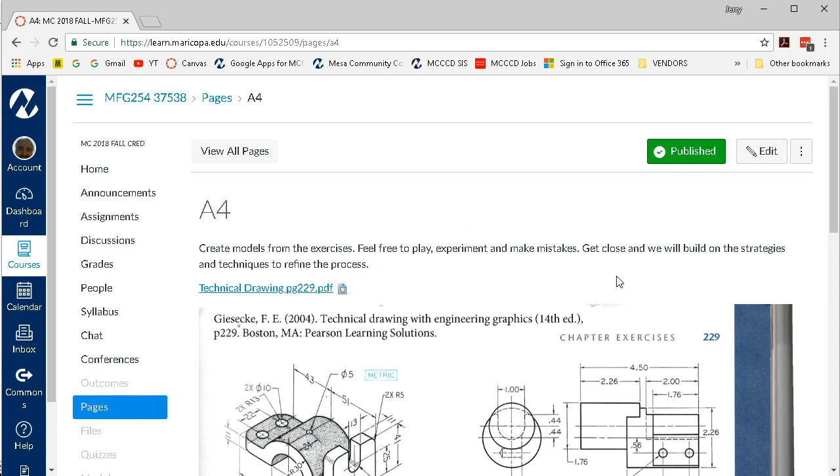So I mentioned rules of the game are take a look at this. We're going to build geometry that is close to this. If it doesn't come out exact, if you have problems with it, turn it in, we'll refine it. We'll build on this foundation material and improve as we go. All right, so this is a mix of kind of the first and second assignments.

So exercise 6-14 is in metric, just kind of taking a look at the shape. When you first look at any of these exercises, let me see if I can zoom up on that a little bit. When you look at any of the exercises, whatever jumps out at you as the best place to start is usually the best place to start. Things like the limit dimension, right? So we have an upper and a lower limit. Those dimensions we're not overly concerned with.

Looking at the shape, this front profile will be of my first concern, and then we'll go back and add holes, slots, fillets after the fact. So this is a building process where we start off with a piece of geometry, then we remove some material, maybe we add some more material. In previous videos, I've been fond of saying this is not name that tune where you have to create everything in one feature, one sketch. If it takes 2 or 3 sketches and you build on that geometry, that will work out just fine.

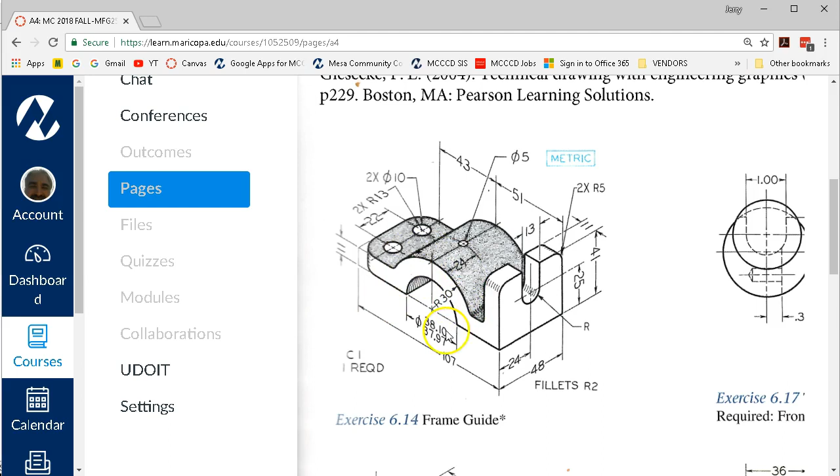All right, so our overall 107, height of 41, depth of 48, and then radiuses for the arcs. So fly that out a little ways. See if I can get it a little closer. Maybe not. All right, so since we're going into a new assignment, we'll pick our new part metric. And position just a little bit better here.

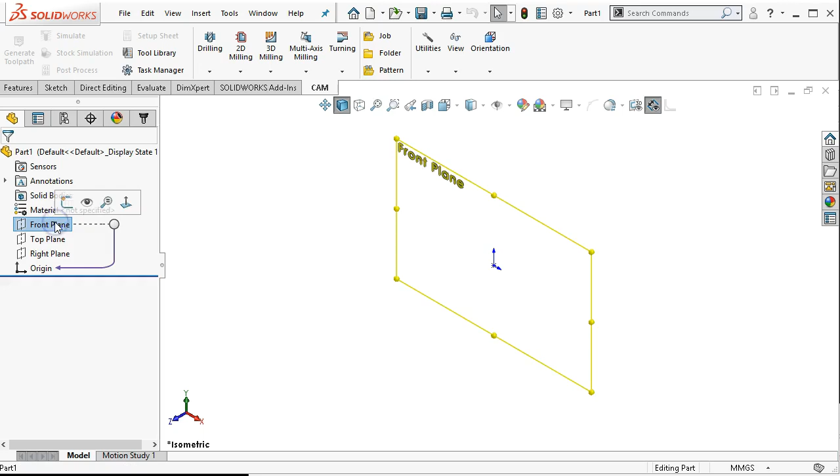All right, so the first assignment, we drew in extra geometry, extra objects in our sketch. So this time I'm just going to go front plane, sketch, and then as we start to draw this geometry, one of the things that you will encounter is called a continuous arc. So if you're comfortable with the strategy, then go ahead and use it. If not, you can switch over to the arc command, and on the upper we'll do that.

At some point you will accidentally on purpose do this, so what happens is you're in the line command, you're drawing the line, you happen to go back past the start point. So as soon as you cross through that start point, it switches to arc, and the tangent arc is going to have multiple solutions depending on which way you drag. Right, so I can always go back to that start point and drag a new arc. Well, most of the time it will go the way I want it.

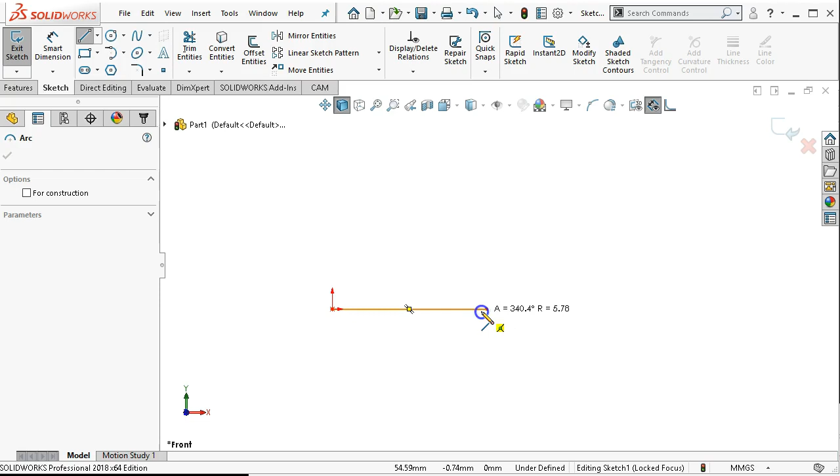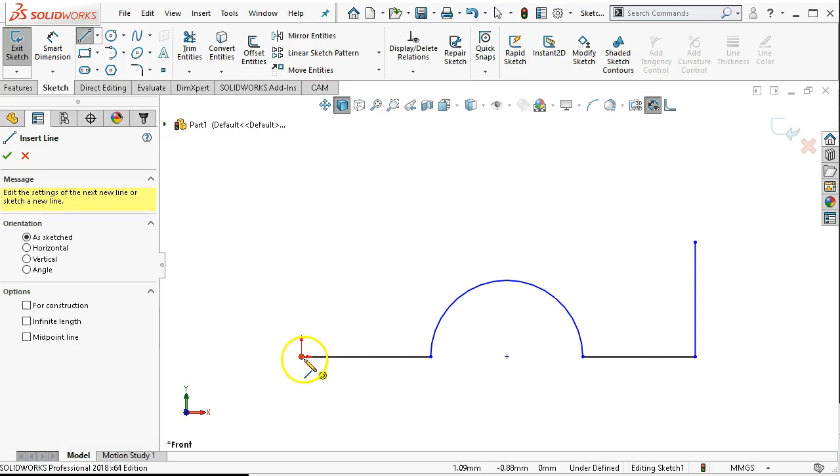Alright, so we had this solution a little earlier, and the advantage here is that once I place the arc, I'm right back into the line command and can continue with my line. Alright, the other not requirement is you do not have to go all the way around this part. As a habit or a tendency, I want to go all the way around, but let's go ahead and just take these first few items. I will go ahead and put another vertical so I can utilize it. Right, and then we'll put in the 107, should auto scale, and the outside was 41.

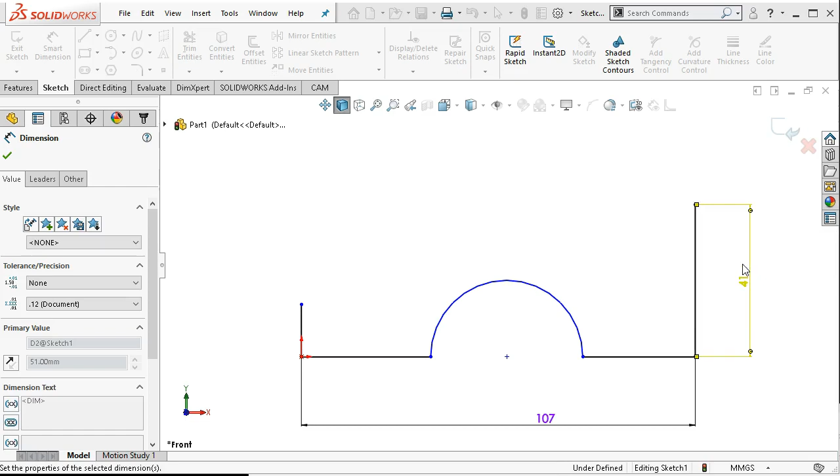Okay, we'll try that again, 41. And the arc radius of 30 was to the outside, and we have a thickness of 11, so that would give me 19. Alright, so I'm not sure I'm going to use that dimension just yet, but I do want to have it there for reference.

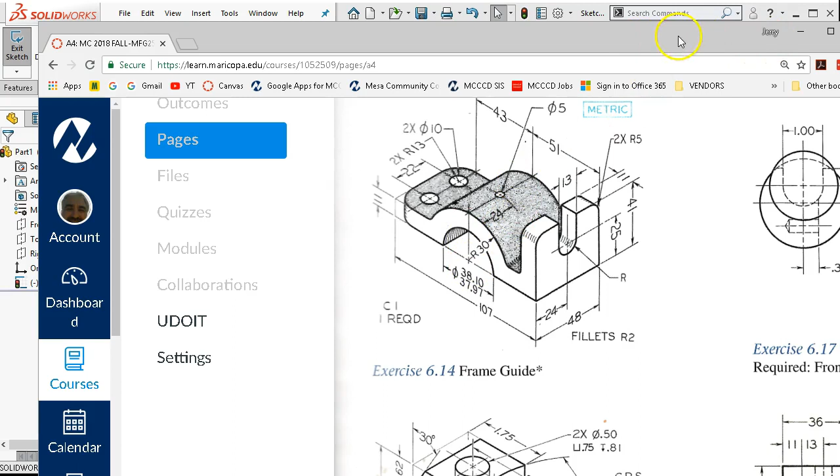So let's fly, see if I can control my views here. Let's go ahead and fly that in. And then as far as position, we have to be kind of careful when we're looking at these dimensions. I get tripped up on them pretty regularly, where the baseline to the center of the arc is 51, and then they carry the holes over another 43. So it's not exactly centered, but I do have to realize what datum we're generating this geometry from.

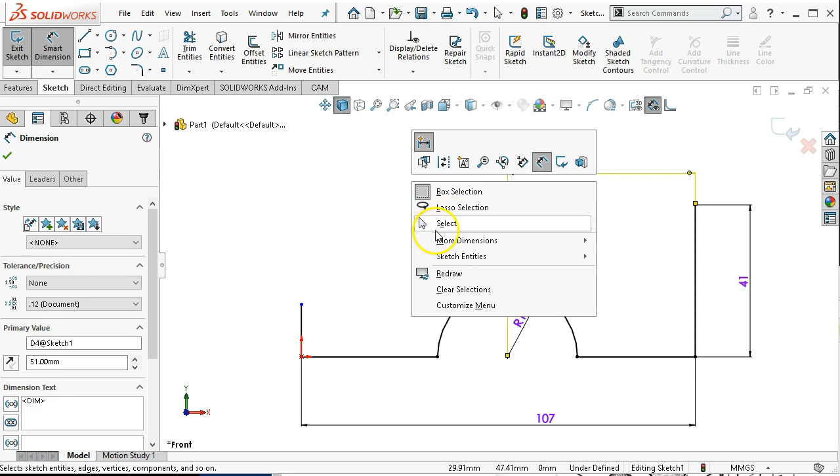So from the line to the arc, and again I would prefer that you use the perimeter or the circumference of the arc as opposed to going to the center point. So right click and select, or hitting escape on the keyboard will allow me to be back in selection mode. With the dimensions, kind of hard to tell. The endpoint is black, endpoint black, the object is black. That's fully defined. On the other end, I am coincident with the origin, so that endpoint will be in black.

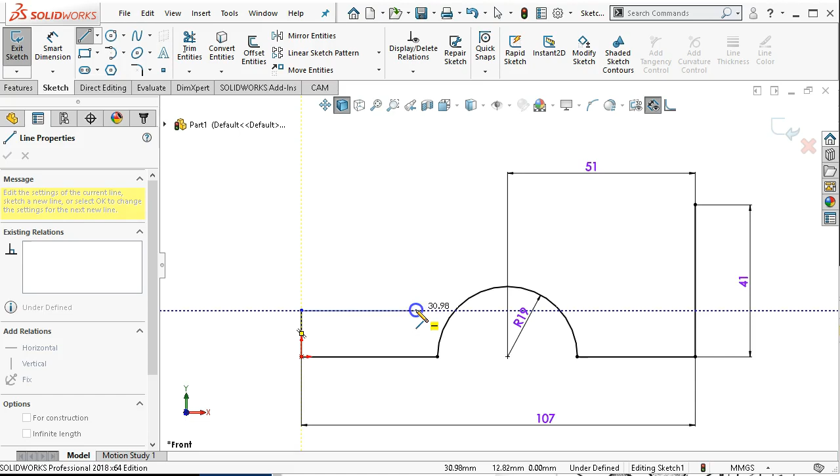The line object is in black, but the endpoint is in blue. That means that it can move, and because of the vertical relation and those constraints that we've applied, it can only move up and down. Okay, so we're going to come over, and I said we were going to use, I guess we'll use a center arc here. I'm going to go ahead and put the 11 dimension on. Gives me the thickness. Now I can see that I have a new blue endpoint to move. This endpoint goes to black because of the relation in the dimensions.

We're going to go to center point arc, and since these are concentric, then I will drag out till it finds the endpoint and then drag through. Alright, so as I'm left clicking and holding down, if you are a clicker, then you'll click, let go, bring it over to the direction you want, click again to position it, and then I'm going to right click to select, and then back into line, up and over, and had a little stutter there, so let's go ahead and get rid of one of those.

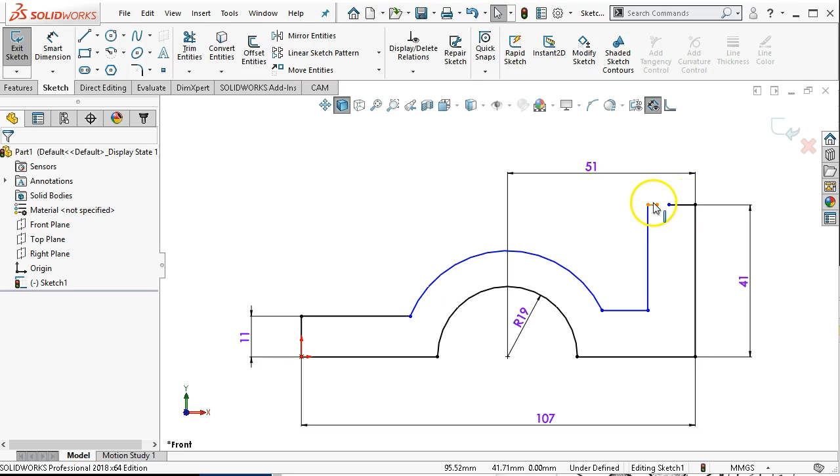So this is one of those situations that have a gap. You know, I hit a bump on my mouse pad, or let go of the mouse, had a twitch, I would get rid of one of the objects, because if I were to bring this one over and connect it, I'm going to see that blue dot as the endpoint, but that's not going to get me to fully defined. Right? Let's go ahead and hit Control Z. I could connect the dots, but that really doesn't do anything as far as geometry. It's not very clean, so that's not going to be a best practice.

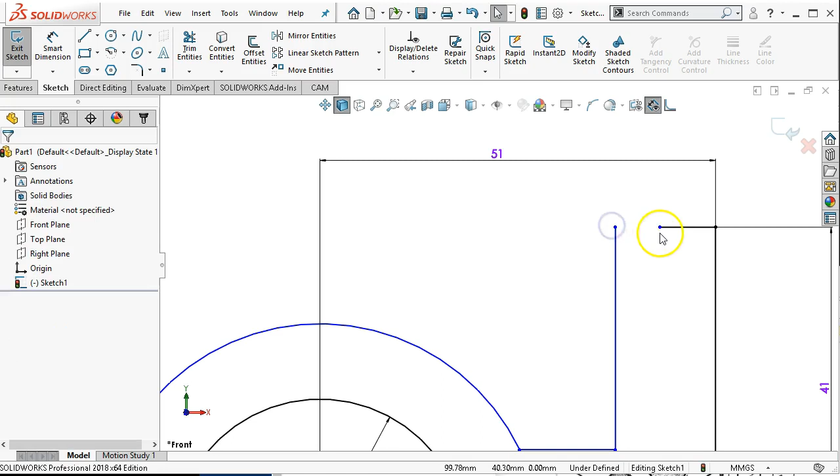Best practice is going to be highlight the object we don't think we need and hit delete, and then we'll drag that endpoint over and connect it. Alright, so we have a radius of 30. Right, and if I was to add one more relation or dimension, I can go between the arcs, but keep in mind that this is going to create a conflict. So this is where things get overdefined or not solvable.

So I place the 11. Make the dimension driven? Yes, otherwise it is going to cause an overdefined condition. I want to see that value of 11. I can apply it, it's there, but notice that its extension line is in gray, and if we double click on it, it's a driven dimension. It's not participating the same way that the 19 and the 30 are.

So if I wanted to include that one, we have parameters on each of these dimensions. If I click the 19 and come over to other, I can switch it to driven, or I could go ahead and delete it. I could delete both of these and reapply. And for the 11, if I want it to be driving, then I'm going to uncheck the driven. Now it's the primary value, and the 19 is the secondary value. So you have the ability to swap these out.

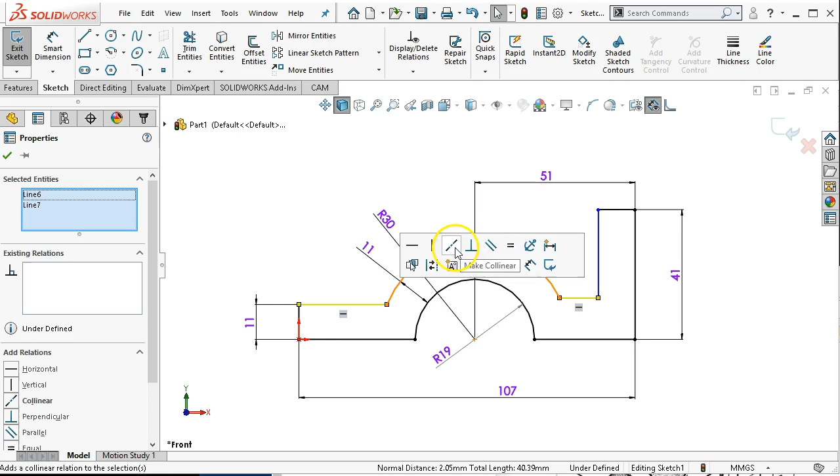So this object moves up and down my line, so I can select and then Control-select another line, and that would be collinear. If we happen to grab an endpoint and the line, then we would be looking at coincident. Notice collinear and those other relations aren't available on this selection. So depending on what combination you select, those are the relations that are going to be available. At this point, there's not any relation that's going to be better than the other.

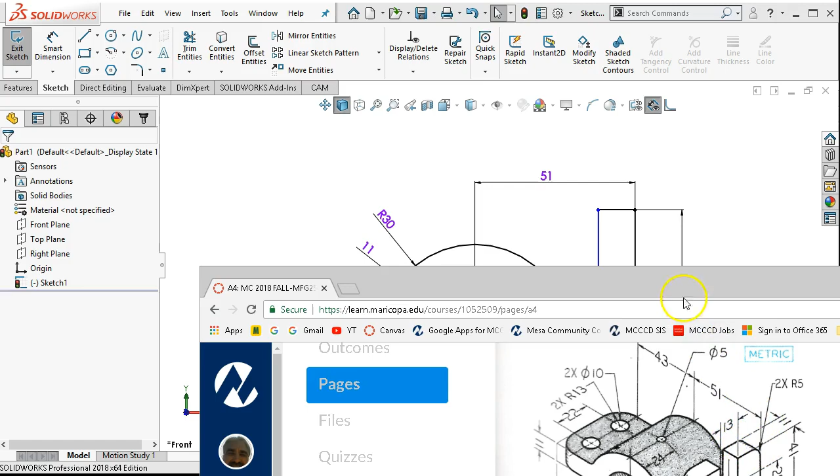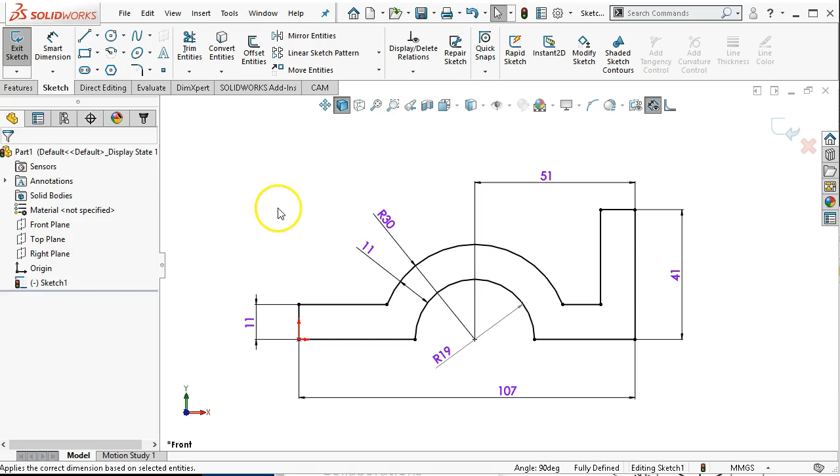So fly this back in just to make sure we have a consistent thickness of 11. So I want to maintain that 11 distance. In this case, I'm going to select Control Select: select the first line, hold down the Control button, and select the second line. Over on the relations, since I missed the pop-up, we'll go ahead and just come over to the Property Manager and set it. So the one issue would be the 11 for the radius.

There's other things that we can do to align those, but if I keep in mind that the 11s have to match up, making an adjustment on thickness is not really a big deal. So our thickness, or our depth, is 48.

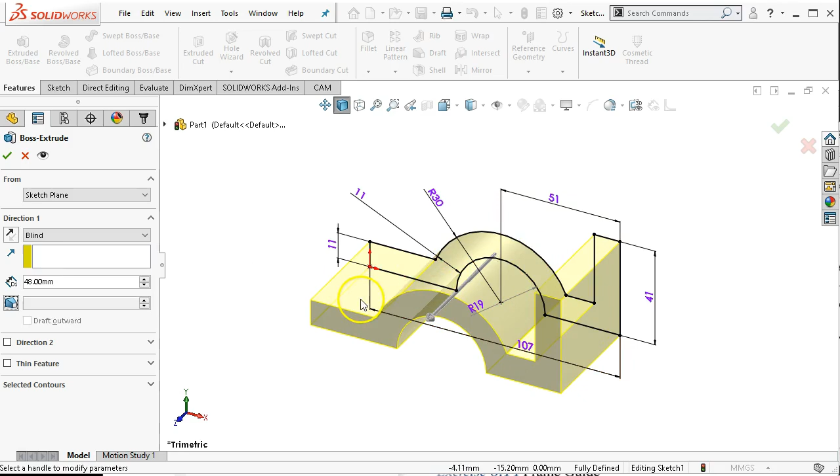So features, extrude boss base, and the choices: we'll put in the 48, blind in condition coming towards us, reversing the direction, or double clicking. I think it was double clicking the arrow - single clicking the arrow sends it to the opposite z. It's not really positive and negatives. Horizontals and verticals are more in line with the sketches, and whether it's coming towards us or going away from us is a matter of the way you see the model.

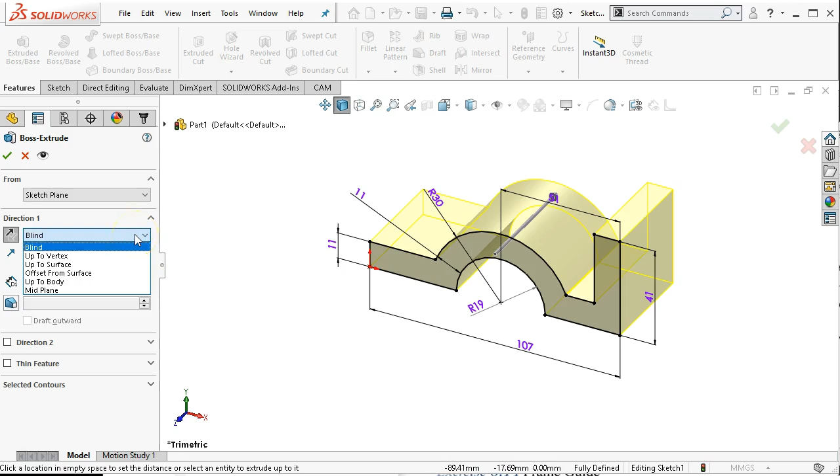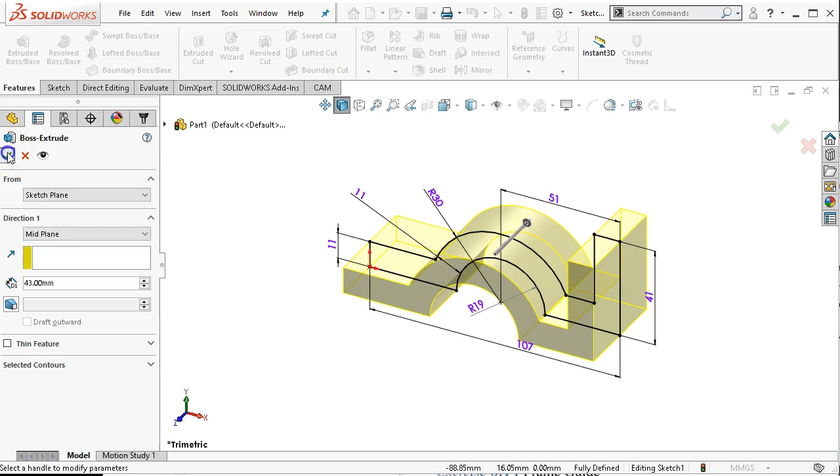So we have the blind in condition. I can also switch up to midplane, and I'm limited in my choices because this is the first object - there's not really anything to work with. So we create this solid. I'm going to stay with midplane. There are several items that end up going through the center of the part or are related to the middle of the part, so midplane has some advantages. If you go with the blind in condition towards you or away from you, that'll be fine as well.

All right, next piece of geometry, let's go for the slot. Slots are always kind of interesting - I tended to overthink them. So I'm going to highlight that face and hit Control-8 on the keyboard so that I'm normal to that face. And then we need to open up the sketch.

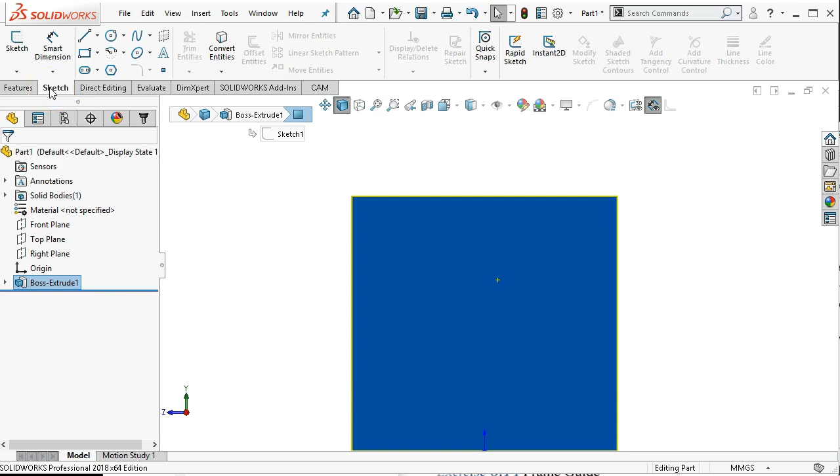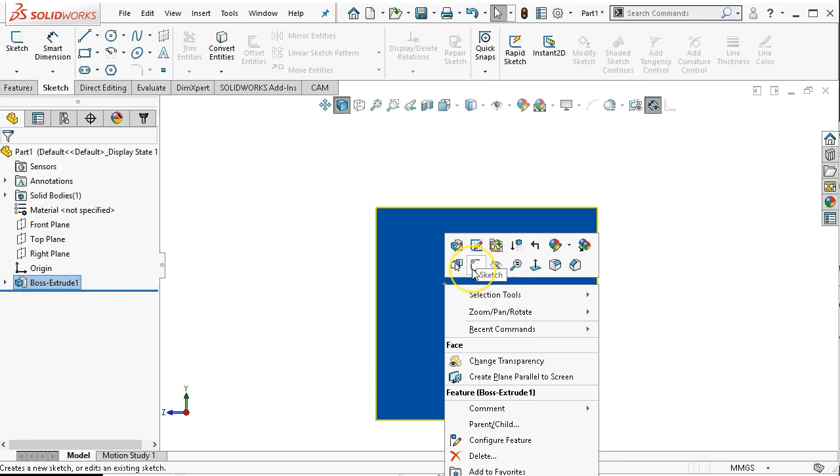So rather than going up to the cam manager, I can always go to the command manager and click sketch, which is highlighted. If I just click sketch, then it's going to ask me where I want to sketch, and I'm going to hit escape to clear that. Fastest and probably the best workflow is just to right click, and edit sketch will take you into sketch 1, and sketch is creating a new sketch. So it opens up that face, it goes normal to - well, we're already normal to.

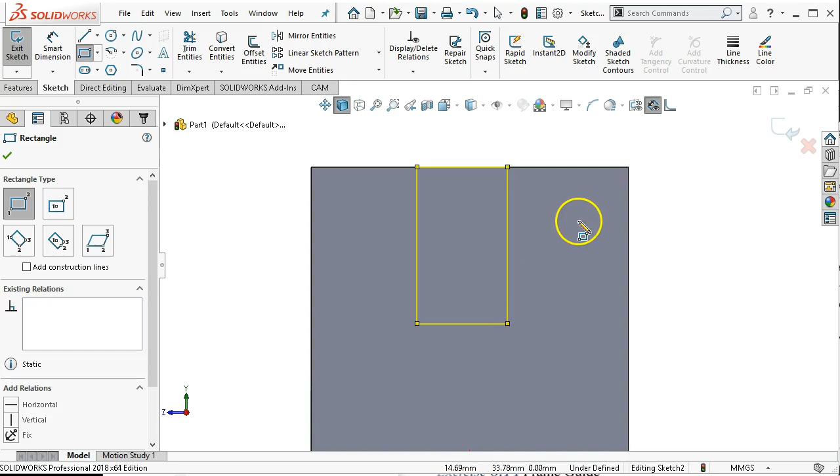And for that slot geometry, I'm going to draw a corner rectangle, picking on the edge to get coincident, and then just drag it out some distance. So when we're looking at these relations, I'm going to have a coincident - the other side, not so much. The rectangle automatically puts in a horizontal, a vertical, a horizontal, and a vertical. So to center this, I'm going to right-click and select midpoint.

Once I've selected the midpoint, I can Control-select the edge and make those midpoint to midpoint. We have a width of 13. So at this stage, practice that right-click.

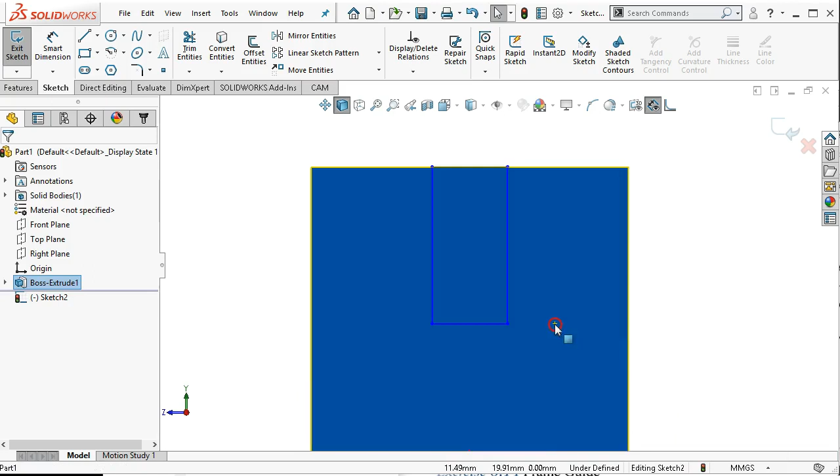Depending on where you are on the screen and what has been selected, you're going to get different combinations of values. You may not see select midpoint if you're on the face or out in the work area. It has to be tied to an object. So those are only really the commands that are going to show up.

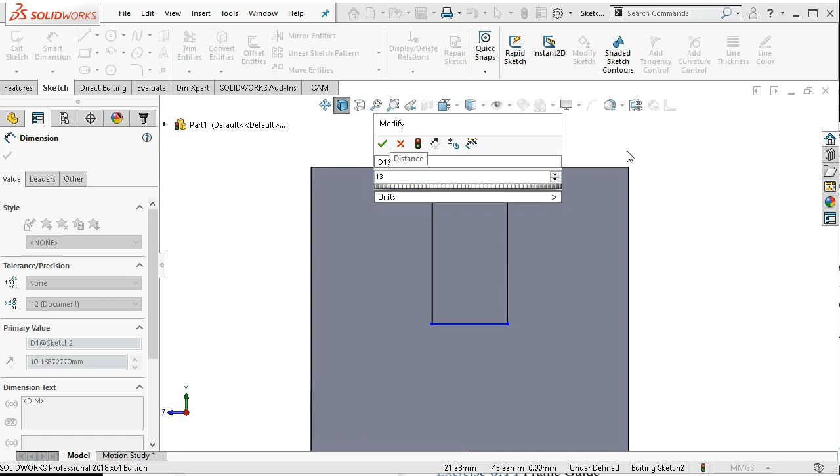So I selected the line, placed the dimension, entering a value of 13, which gives me the depth. Then I'll right-click and select, and we'll apply that back in.

From the base, it has a center of 25. I don't really need this line, but I don't want to delete it. So our object geometry can become construction by going to the property manager and clicking for construction, or toggling out of the pop-up construction geometry. Again, centerline and construction geometry are the same thing.

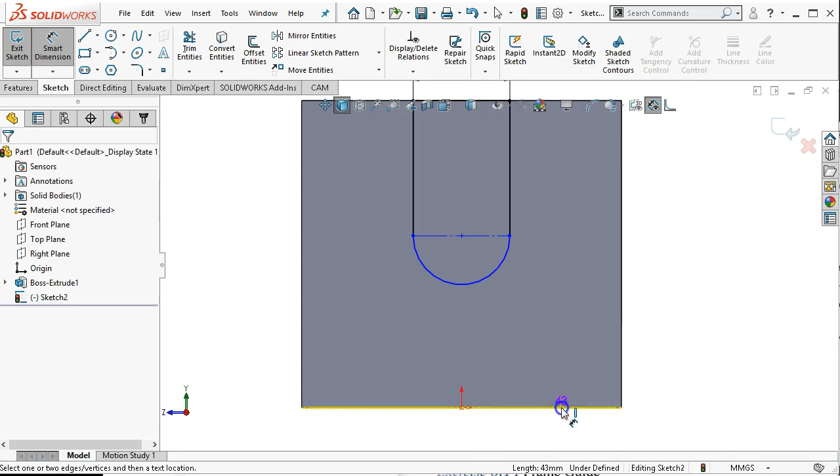And from the bottom edge to the arc is 25. Okay, we'll check that dimension. In effect, the midpoint overrides the need for the 24, if you want to have those values built into those dimensions.

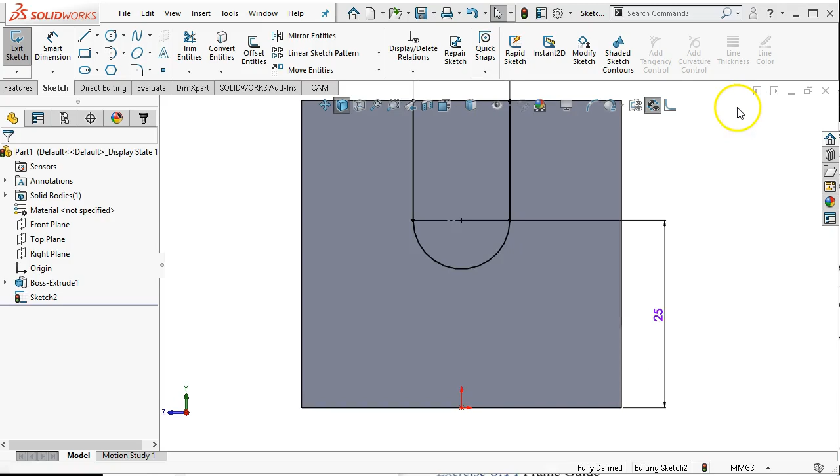I'm really trying to emphasize the relations and what you can do with the relations. If you want to stay with the dimensions, that's okay for building out the shapes.

So I'm holding down the middle mouse button and rotating the part around. Looking at that depth, the through-all is going to go through my center geometry. Let's take a look at that end condition when we perform an extrude cut.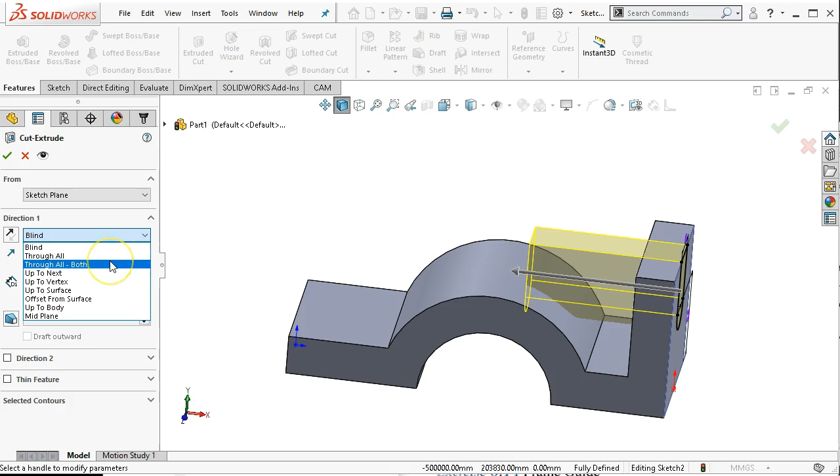And I'll rotate around again. So with a blind end condition, we could set a value of 11, but if the thickness of the part changes, we're going to have to come back and adjust the cut extrude as well.

Through-all goes all the way to the last piece of geometry, and you can see the intersection where it will remove material out of the center of the part.

This is an instance where up to next, up to surface, or up to vertex would be good choices. Up to next is probably the easiest—it just finds that next face and terminates the extrude there.

All right, what do we want to put in next? There is a hole of 5 millimeters through the center of the part.

So let's go to the top plane. Since it's in the center, top plane is a good choice. The bottom of the part would also be a good choice. Those would be okay choices. These two faces—not great, but okay.

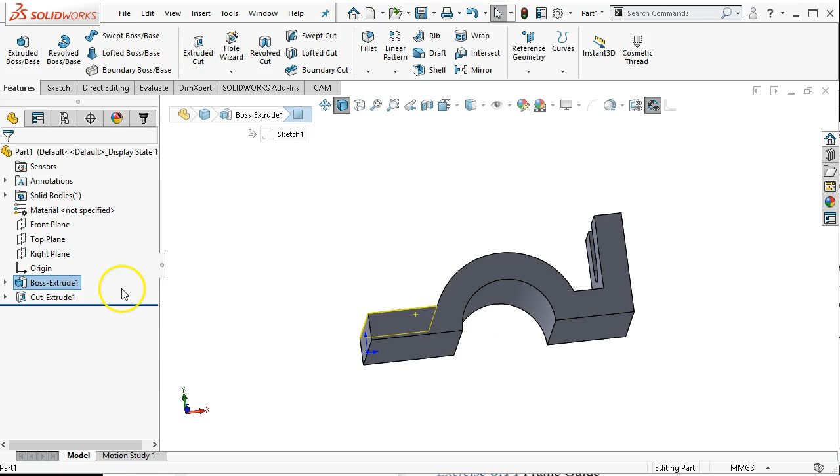So whether I go with the top plane or the bottom of the part—notice that picking the bottom of the part rotated into orientation with that face, whereas the top plane probably would have shown me the top of the part.

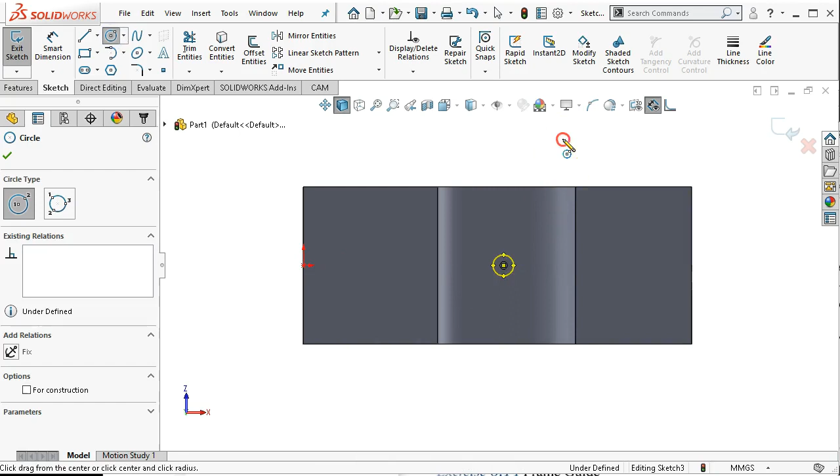So for my sketch, I'm going to find that inference line. The blue line is telling me that I'm horizontal. I'm going to go right into the smart dimension, 5 millimeters. And we know that the center was 56.

So I can apply that dimension, but I have another tool—we seem to always have another tool at our disposal. This one is under the hide/show items. We can turn on a temporary axis.

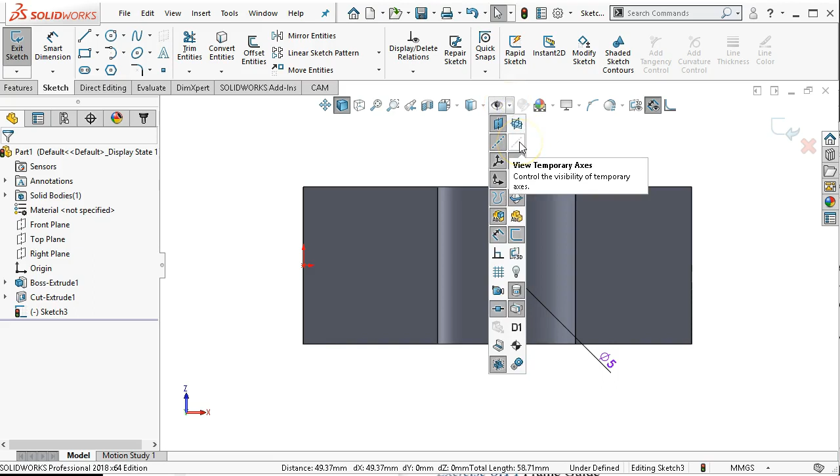On the temporary axis, any arc automatically generates a temporary axis, and I can make my center point. In this case, I do want my center point, and hold down the control button, select the temporary axis. I could go midpoint, but I want to illustrate the coincidence. If I went midpoint, it should be the same length as the arc. If I go coincident, it positions, but allows the circle to move.

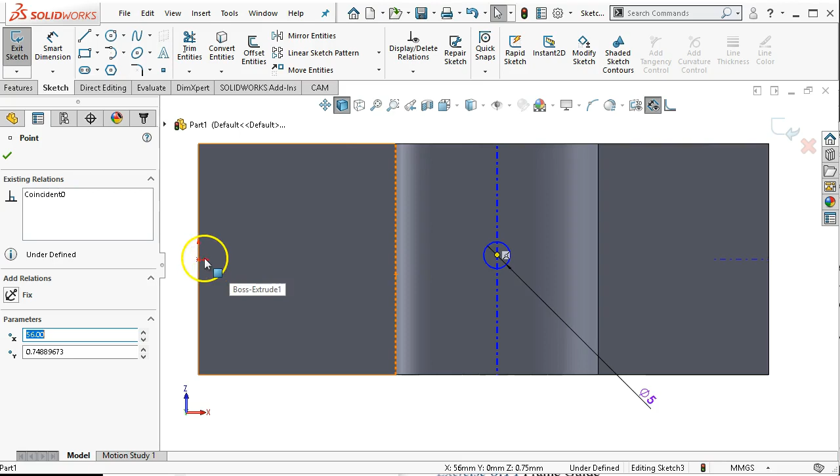If I hold down—I've selected the center mark—and hold down control and select the origin, and go horizontal, that's going to cause my sketch to go fully defined. Then we'll go back to view to clean up after and turn the temporary axis off.

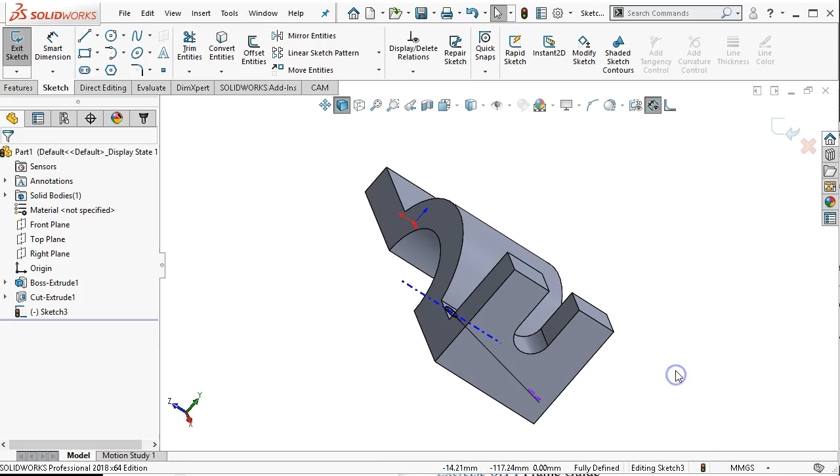You may have noticed there was also a blue line where this arc was generated over here. So we can still see, because of the relation, that temporary axis for reference, but the rest have been turned off.

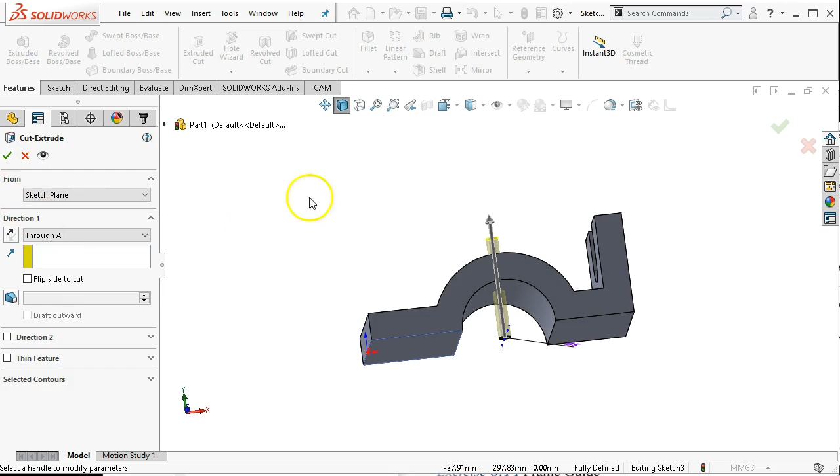So again, let's go with an end condition other than blind. We'll go to through-all. Through-all finds this is the terminating face, but it's not interfering or going to take too much geometry, so we'll go ahead and complete the hole.

All right, we have two holes of diameter 10, 22 millimeters apart, and they'll be on this face.

In contrast to drawing the circle, these could be circles, but I want you to get used to and recognize the hole wizard. Coming up to the command manager, looking at the hole wizard, or picking on a face and pressing the S key, we're going to find that same icon for the hole wizard, a pop-up from the S key on the keyboard.

So it is a simple hole. We're going to go to ANSI metric. The type is, this is not a dowel pin, we're not setting clearances or press fits or anything like that.

So under dowel holes, or when we do the pull down next to dowel holes, we're going to get drill sizes, helicoils for threaded inserts, screw clearances, and tap drills. So if we had an M10 bolt or socket head cap screw, then we would set for clearance. We probably have a number 8, or we have something else going through there.

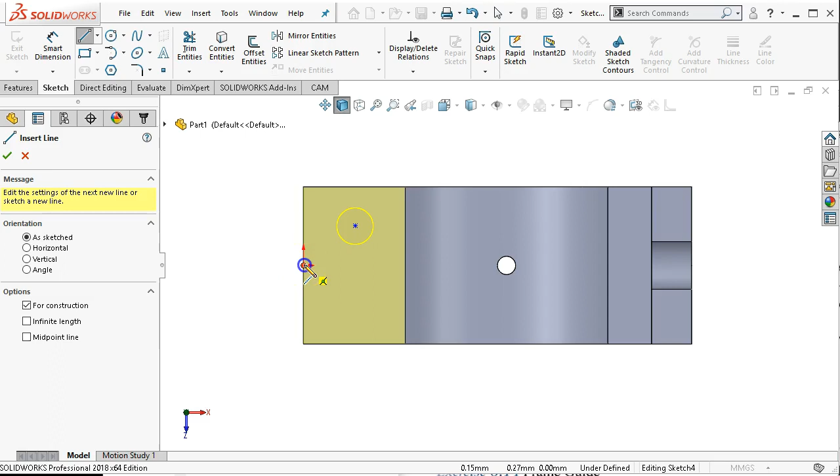We can go to line, and if I draw a center line, notice that for construction was selected. We can go all the way through the part.

One note on picking at what would be the midpoint of the arc: if something happens to that slot, if I remove that cut extrude feature that created that slot, I know I'm going to get an error for that endpoint. It's not hard to correct, but you have to be aware of the selections you're making and the implications further down the line. Chances are there's not going to be any issue with the slot.

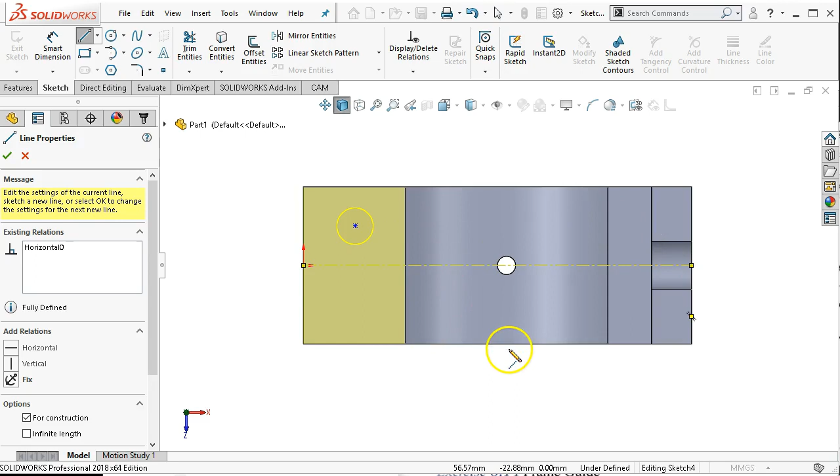That's as good as finding the midpoint for the arcs.

I could do the math that said 51 plus 43, coming off the outside edge to the center of our arc, and then 43 to the center line of the holes. If I create that center line in reference to the arc, then I can go right to 43.

All right, so select. Keep in mind that the hole wizard is only that point. We'll take a quick look at what kind of geometry is generated. The circle is just for reference here. So when you're sketching, pick the perimeters; when you're in the hole wizard, you can pick the point.

So when I go to mirror this entity, if I just select mirror, the entity to mirror will be the point, and the mirror about will be the center line that I drew. There are other geometries available for the mirror about. Most of the time, go ahead and create your center line.

Another technique, and probably my preference for workflow, is to pre-select: select the point, hold down the control button, mirror entities, and it automatically goes to the mirror. It has enough in the selection to find a solution.

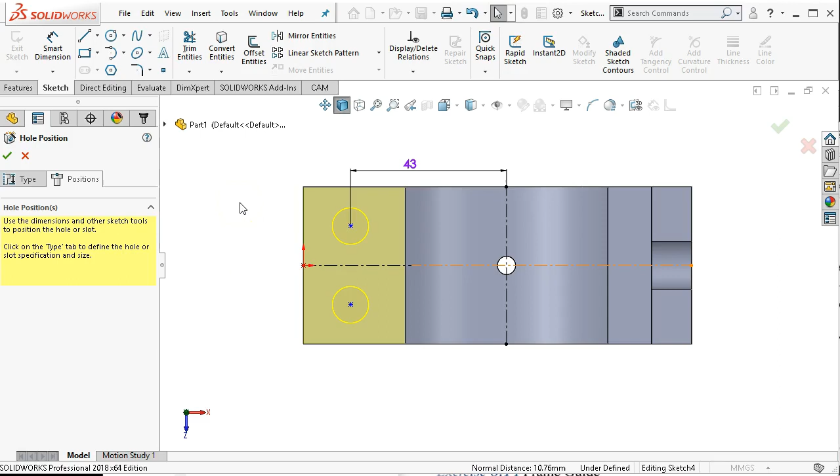And then the last one would be, if I just pick the center line and go into mirror, well it didn't quite put it where I wanted it. So if I were to just grab the object I want mirrored and tell it mirror entities, I could go on selecting objects and then come back to the mirror about.

Also notice there is a checkbox for copy. Just like the copy and paste from the sketch objects that we ran into in assignment 3, typically you're not going to want to uncheck the copy because you're going to lose relations. You're going to have to reapply dimensions or other relations that were part of that mix. So there's other ways to deal with the geometry if you really don't want to copy it.

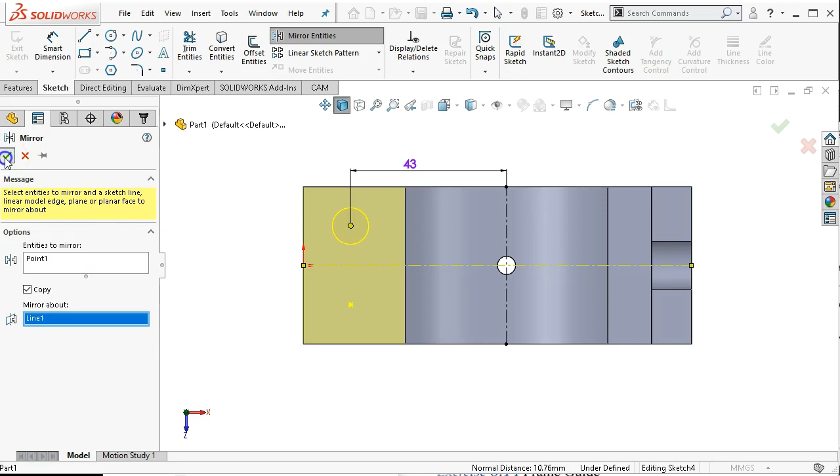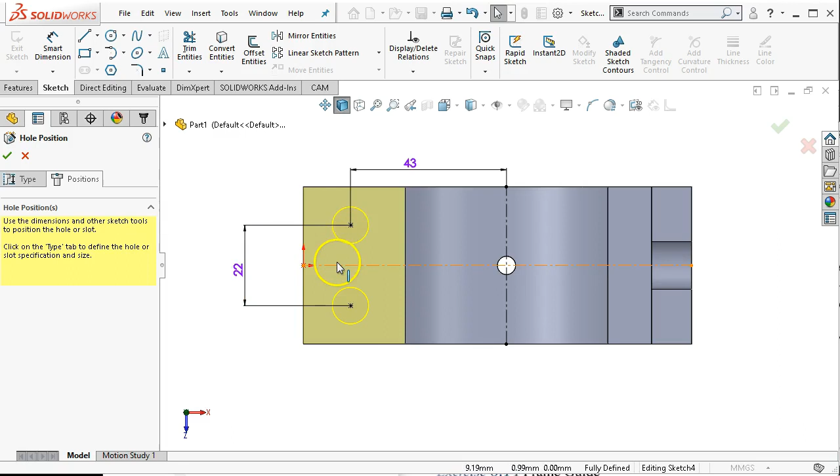All right, so let's go ahead and select. We'll put in 22. And because we have the mirror relation, we know the position of the center line. Mirror is going to be symmetric across that center line, so it is automatically dividing the 11 and the 11 to get our number. Okay, so we have the position. We have all of our major geometry, and as kind of a last feature, then we'll go to the fillets.

All right, so the interior fillets are a radius of 2. There is a radius of 5 on the outside and radius of 13 on the very far outside. So let's go with the inners. So radius of 2. And then select, control select, fillet, radius of 5. And then select, control select.

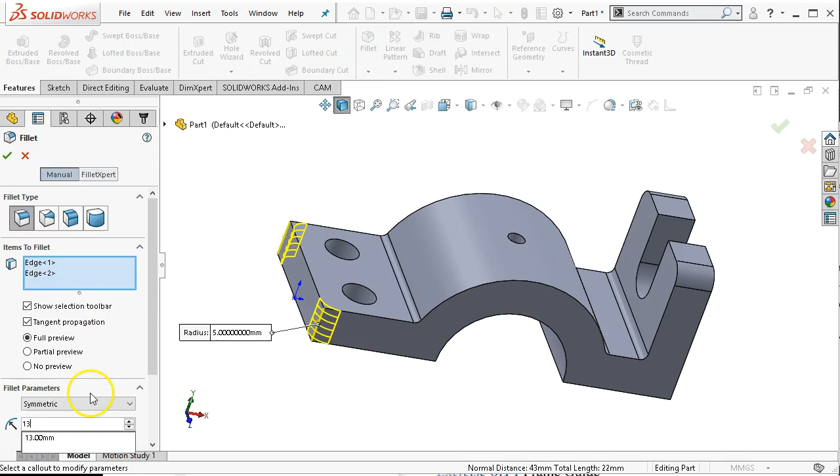All right, and I am picking edges because to pick the face means that everything connected to that face gets the fillet. So if I'd pick this face, 2 millimeters along the edges, if it could find that tangent edge, it would carry up all the way around, and it would also do the holes. All right, and then 13 on the outside. Okay, so that completes the part.

We're going to go back through at least the first part of this with another strategy. Also, I mentioned the limit dimension, and I just put in the 19 for the radius, the 11 for the thickness. This is an actual tolerance value, so we're going to come back and revisit that in this next go around. All right, so I'm going to go ahead and save this. This is exercise 614. So let's go ahead and save.

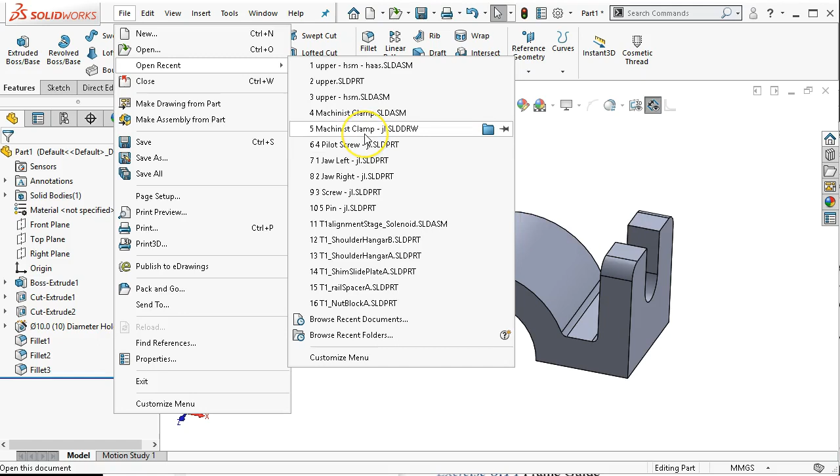And navigate back to my folder. Okay, so I lost my folder, so since we've been saving to the same location, a quick way to figure out where those files were going is to come back to Open Recent, and then we'll just hover over any of the previous. So I was putting these on my OneDrive, so let's go save, and it was on OneDrive somewhere, and then there's the 2018. All right, so assignment 2, assignment 3.

Let's go ahead and do assignment 4. And we said that this was 614. I try not to put periods in, so if you want, you can do the underscore or dash 614. You could also name these as the frame guide. You know, whatever makes the most sense. All right, so there's my first version.

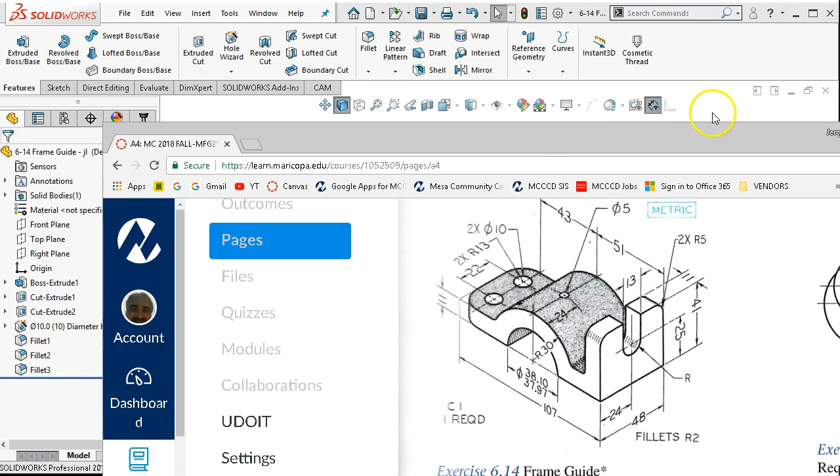All right, so in contrast, when we started with the sketches, we can also do contours and regions. So when it goes into just the outside geometry, notice that our sketch is kind of the standard sketch icon. There's not anything shared between features. So I'm going to create a new part metric, and the contours and region has an advantage in that I can set envelopes. If I wanted the arc at the middle of the part, we can kind of move around and make some different choices.

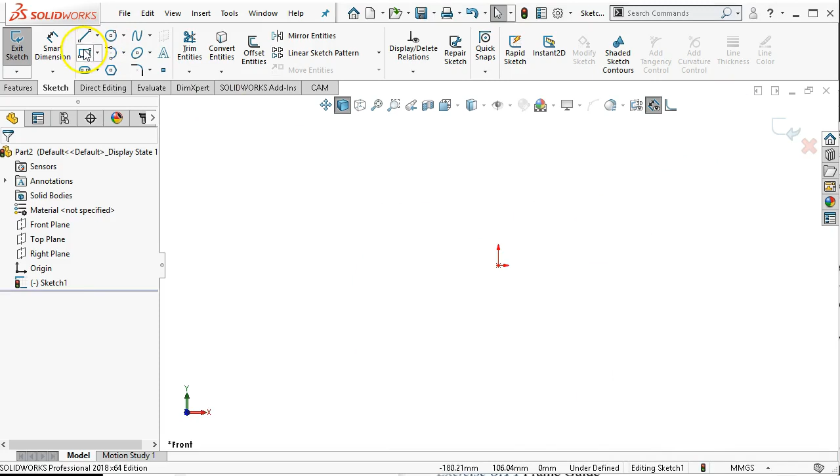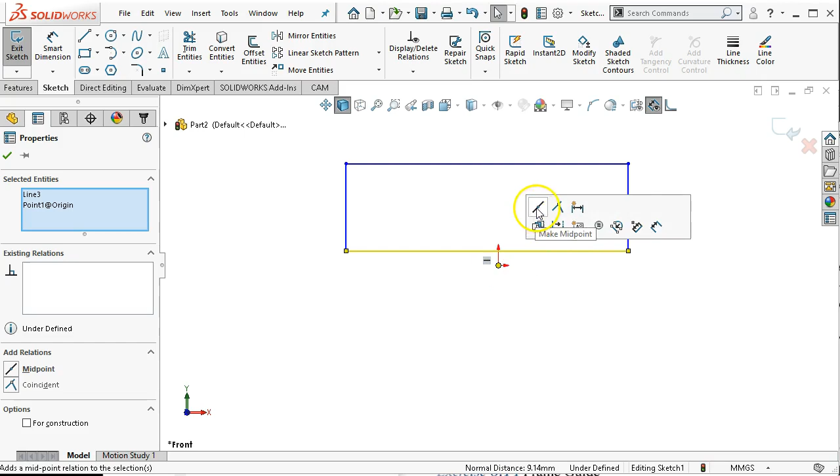So setting up the envelope, we're going to go 107 by 41, and that's just going to be a rectangle. And I want to emphasize too that last time we started at the origin, it doesn't have to be a corner that starts at the origin to set that definition. So I selected my line, control selected my origin, make midpoint. That gives me my first definition. And then we go to the 107, and then I can set to 41. All right, so contours and regions. Again, we can draw this in and go back and trim it out, but it isn't really necessary.

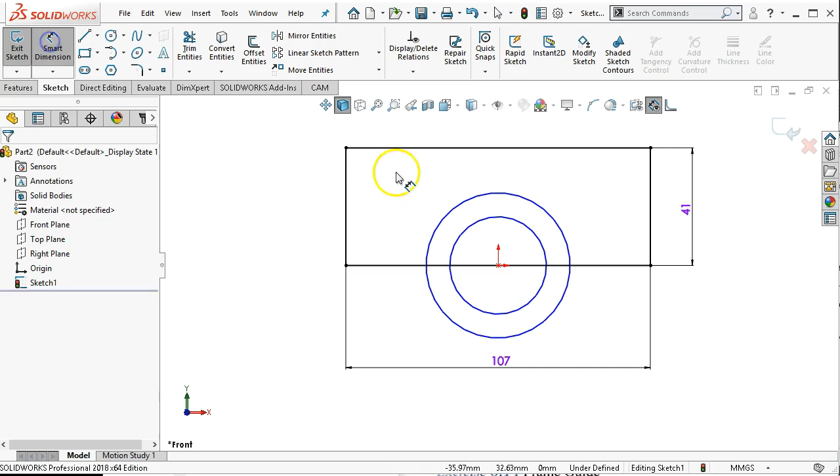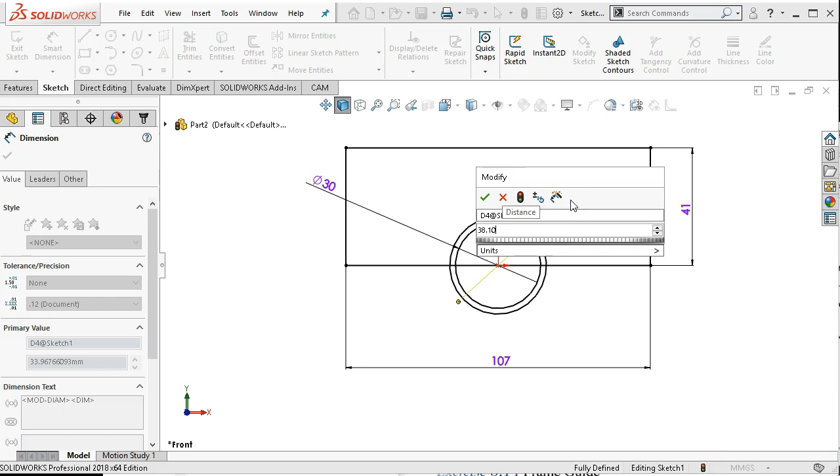I can utilize my geometry so it goes a little bit faster, even though it's maybe a little bit more to look through and to deal with. So we have the radius of 30, and then for limit dimensions, and this is kind of why I waited on discussing limits and tolerances, we're always going to go to maximum material condition. When in doubt, maximum material condition is the better choice.

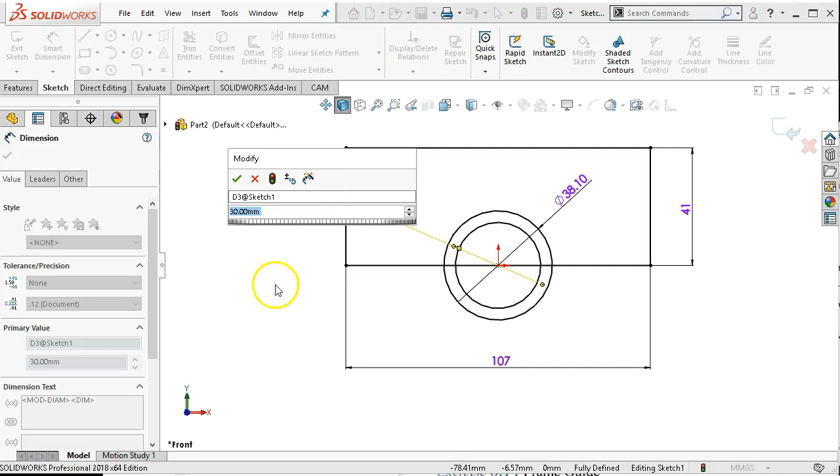Oh, and since that was a radius, and my first clue was that my 38 got bigger than my 30, so when I checked the dimension, yep, sure enough, it was a radius. I have an option there where we can go ahead and set it to 60, but if I want to see it as an actual radius, since it's a circle, it's going to default to diameters. If it was the arcs, then it would default to the radiuses.

Over on my property manager, the values are set, and under leaders, I can switch between a radius and the diameter or a linear dimension. So I'm going to switch to radius, and that'll show the radius of 30. And then we're given the diameter of 38, actually that is the maximum or least material condition. All right, so 37.97, we're kind of split.

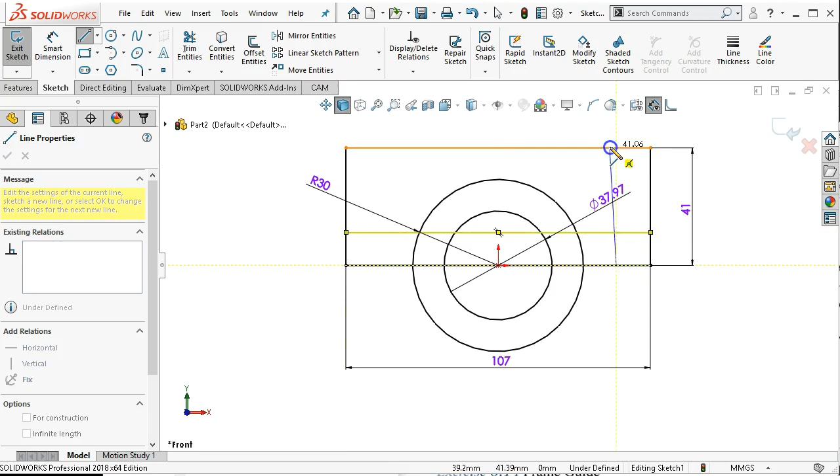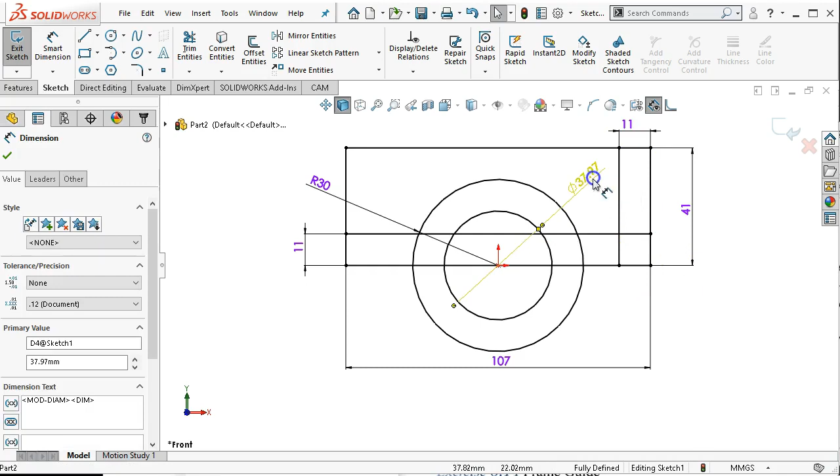All right, so a couple of lines at 11. And a couple of dimensions. I'm not going to worry about making those equal or doing anything at this point with my two objects. All right, so plus side is I generated this pretty quickly. It's not really sloppy. It's fully defined, but it is busy. Let's just call it busy. We're going to go ahead and extrude.

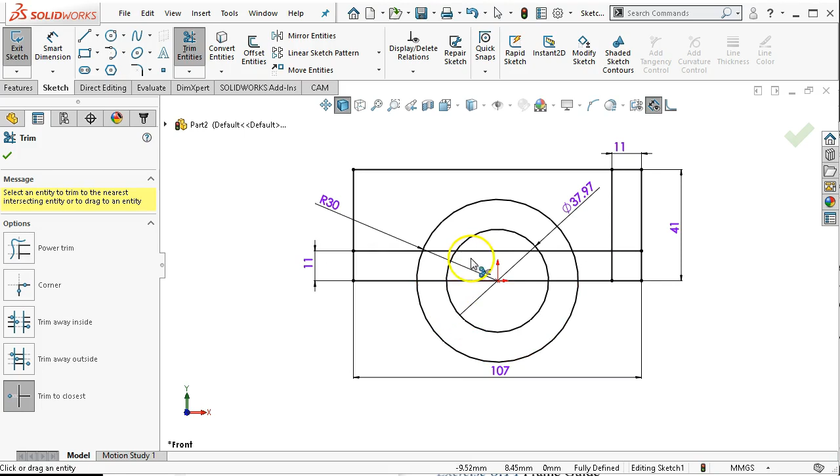One quick comment on trim. So bring it back to Control 1, back over to the Sketch tab. When you're trimming entities, stay with the trim to closest, power trim, whatever you drag over. And what trim to closest is going to do is whatever you pick is going to go away. So you could go remove all these lines, but it isn't really necessary.

And if there's geometry that we're going to add later, there's unknowns. Our magic crystal ball of design intent is a little bit cloudy today, that we may want to add or take away or make changes. Having this extra geometry isn't going to hurt anything. It may not help anything. But we might be able to utilize it for something else later on.

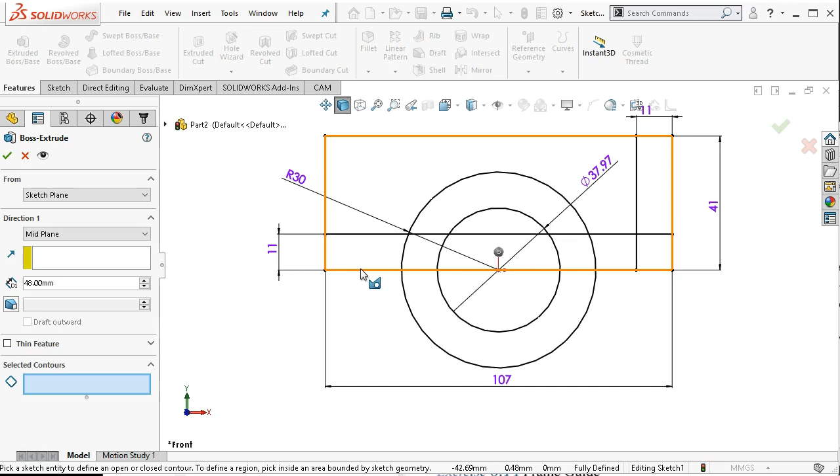So extrude, and I'm going to stay with the midplane, and the dimension was 48, and then when we select contours and regions, let's bring this back, notice that whatever highlights, so if I pick the rectangle, I'm going to get a rectangular prism. I start picking regions, then I'm going to get those regions.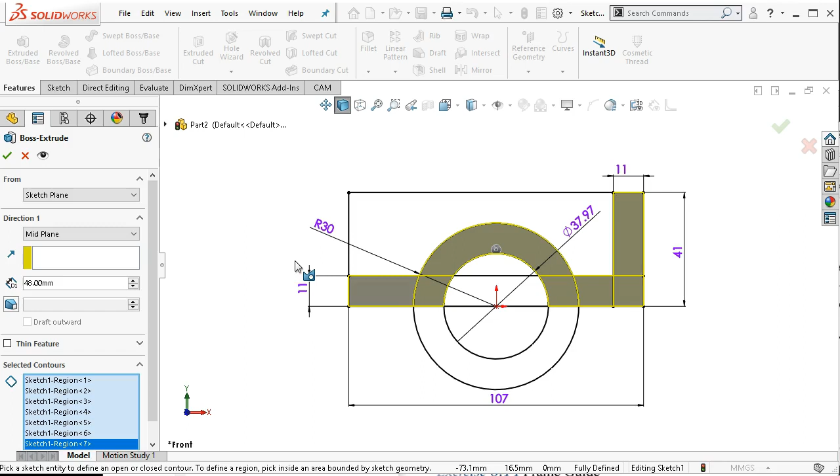So what I would want to watch out for, what would be a concern, is maybe this crosses the line and there's a little tiny sliver that needs to be included. Don't be shy about zooming up, finding those potential missing geometries. So downside concern for the contours and regions, there are areas that can get overlooked or missed, and you want to do your best to make sure that doesn't happen.

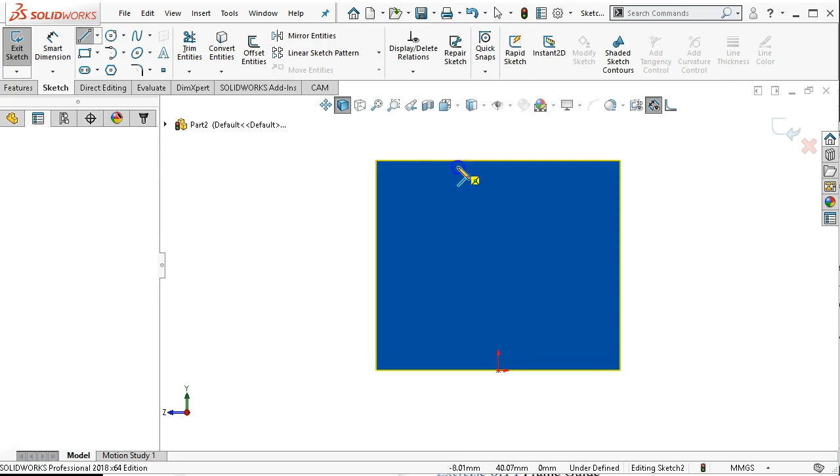All right, so I'm back to the same location. Let's do a slightly different one on the face. I mentioned that we can dimension to the arc, so I'm going to use the continuous arc again. So we have the line. I'm still in the line command. I'm going to go back to that start point and drag out to finish my arc.

Back into the line. And I could use this as an open profile. This open profile will cut, but we would either have to give it a blind end condition that would have a value of 11, or use the through all, which would break through the part. So making this a closed contour is still going to be the best bet.

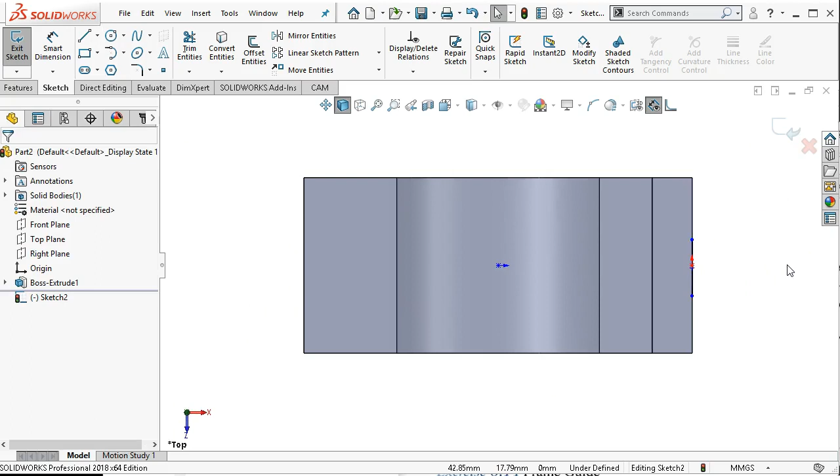All right, Control 8. Now the thing to watch out for with tangencies, well, let's go ahead and define this a little bit more. That did pull up the tangency. I'm going to go ahead and highlight that tangency and delete it for the example. You don't need to do that. Okay, so let me go ahead and get a dimension on it.

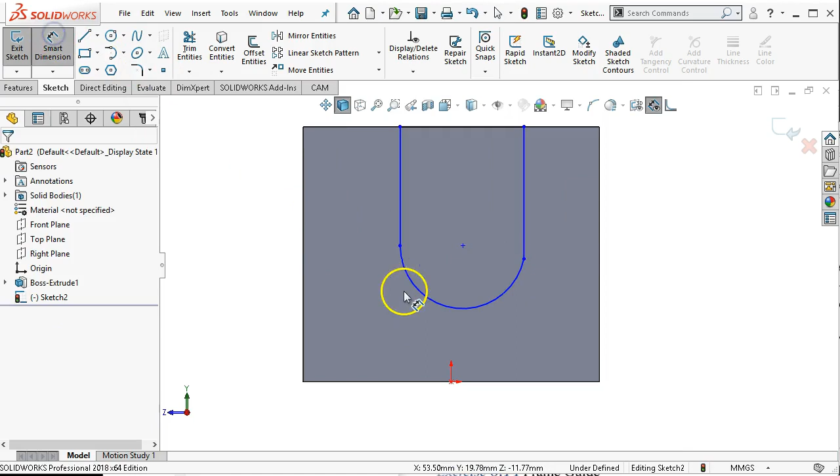Find my edge, 25 and 13. So if I picked the arc in this case, it would have given me the radius as opposed to all the way across. And then we had a dimension of 24, so that positions it.

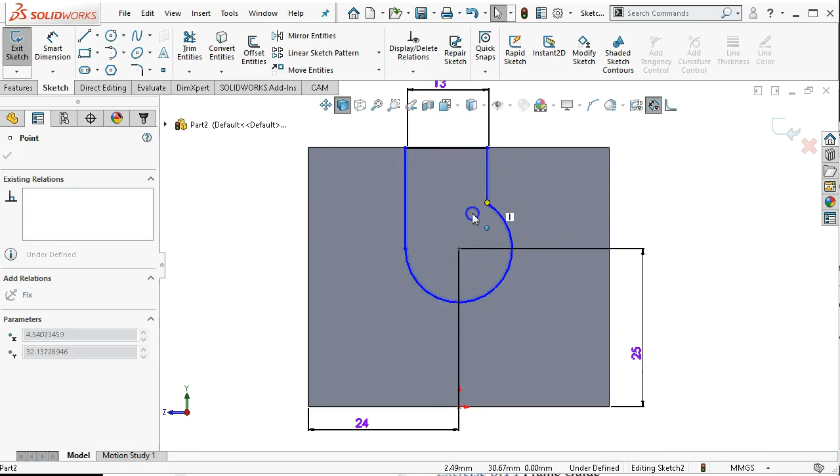All right, so the thing to watch out for is, since that tangent I removed was controlling the blend, if I can go to a sharp where that arc meets the vertical line, then that's going to be an indicator that we're missing a tangency. All right, once I add it, the sketch goes back to fully defined.

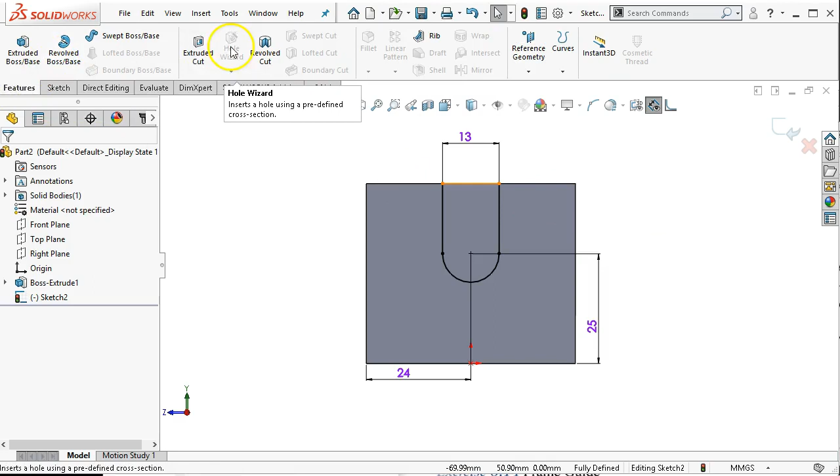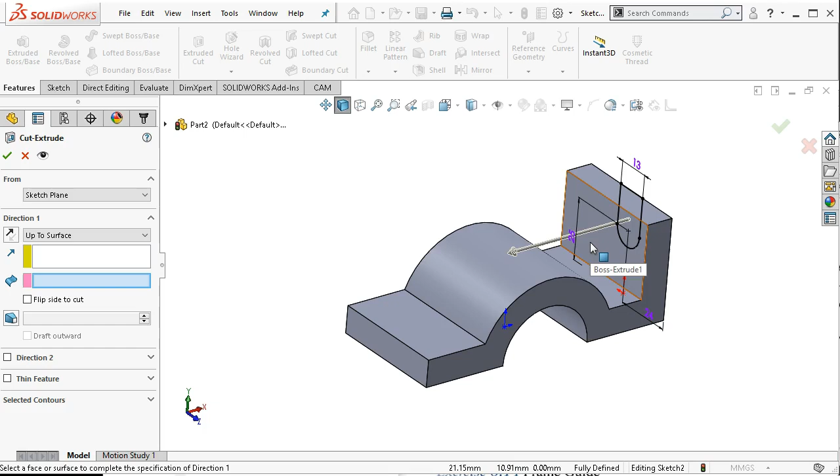Features, extrude cut, and through all. Oh, let's try up to next. Now let's go to up. We used up to vertex previously. Let's use an up to surface. Any of these up tos, for the most part, are going to require a second selection. So I pick the surface, and it will terminate at that surface. Depending on the geometry, it may actually follow the curvature or build out that additional geometry.

All right, so I mentioned if we sketch on the face, now that that is my center, I can put the 5mm hole in. And before we use the hole wizard for the 10 millimeter, we're going to discuss planning your planes a little bit to where we can have one sketch with these multiple geometries.

Alright, so to get my circles, when I pick the perimeter, and I don't want to mirror, well, I already drew the circles, so I don't need to mirror. If I were to mirror, I would be mirroring one on top of the other. So I'm going to use a symmetric command. So preference is to go with the perimeters. Let's watch what happens if I were to just go to the center marks. The centers will be symmetric, so they'll move together, but notice that the diameters are going to be different.

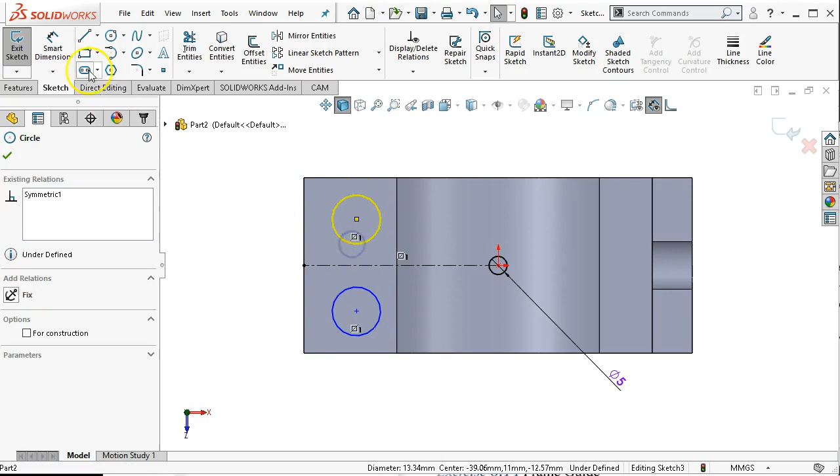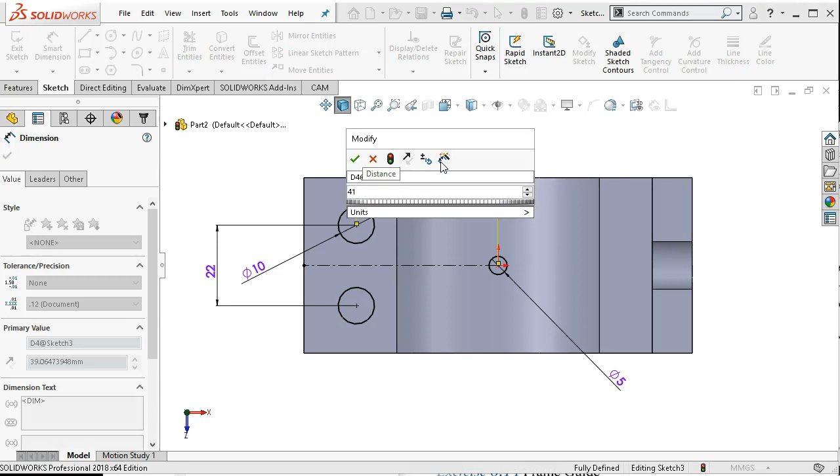So we have a diameter of 10, a distance of 22, a distance, we can go from the origin. Just be careful of the point to point from the origins, because that linear distance would in effect allow a certain amount of orbiting, depending on what the other dimensions and relations are capable of doing. So that was either 41 or 43. I think it was 41. And that puts it in position.

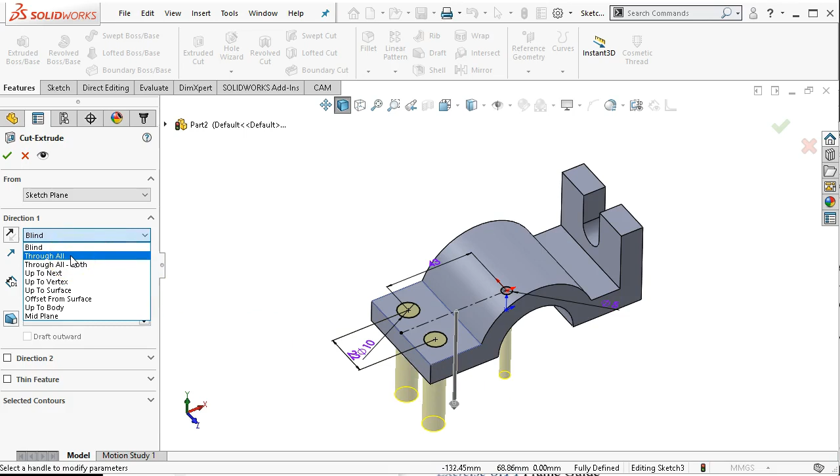Alright, so my sketch plane is kind of through the middle of the part. So if we extrude cut, then everything is going down. And we can tell it to go through all or up to next. But this would be one of those cases where I'd want to use through all both. So the two holes are going to give me an end condition that terminates through the material. The small hole is going to give me an end condition that terminates through the material going up. So as long as it meets that there is something to cut condition, then the cut extrude will perform okay.

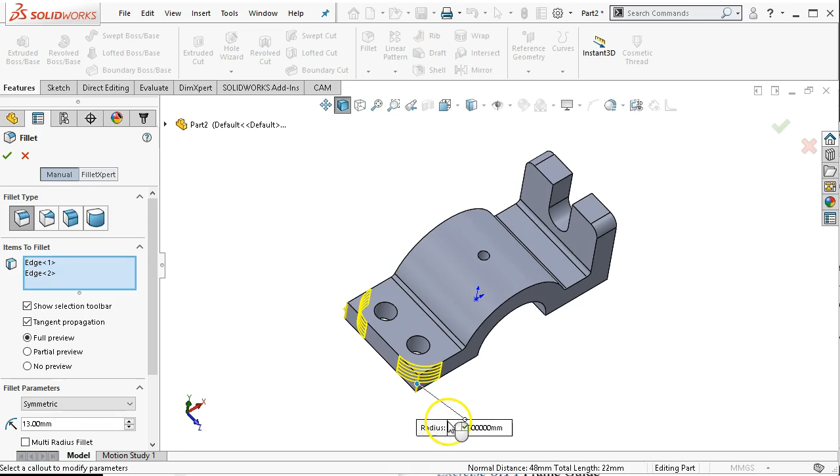Alright, and I started with the smallest radiuses last time. There really shouldn't be any difference. So instead of going up to the command manager, we'll go over to the pop-up, find the fillet, and you can use the pop-up boxes. Not sure why it's coming up with 10 decimal places, but there they are. And right-click to OK. And fillet. Go 5 on this one. Enter. Right-click to accept. Left-click. Select, Control Select. And 13. Right-click to accept.

Alright, so same part, same geometry, differences, contours and regions. Sometimes contours and regions are going to make sense for your part. For the assignment, pick one. You don't have to do both of these. You can do both of them, but I'd still say pick your favorite method and run with it, so that you go through the process. Just be aware that there are others available. So let's see, what do I want to do this one? I'll do CR, contours and regions, initials.

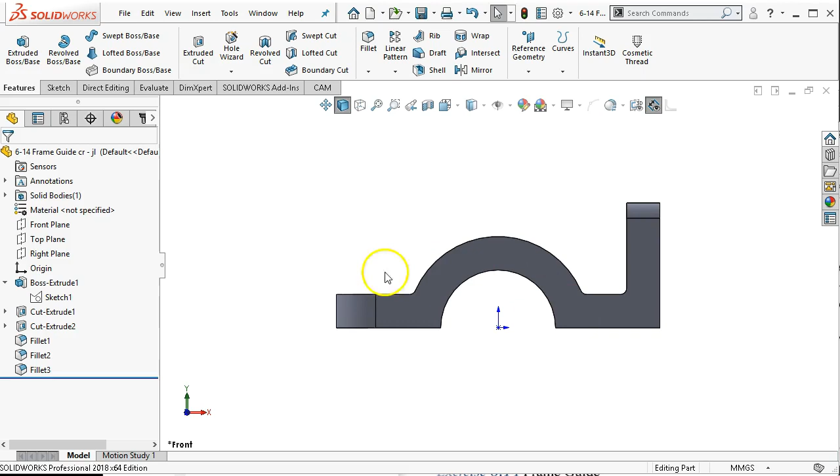Alright, so I'm going to go ahead and stop the video here. Our next project will be back into the sketching. We're going to go a little bit different route with it and pick up with that next time.